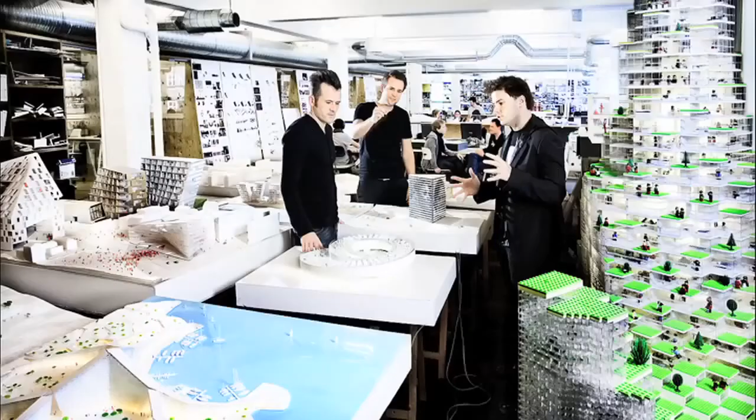Essentially, we're a company that's been around for 12 years in Copenhagen. These are our Copenhagen offices. We recently moved into this big, nice space with 40-foot ceilings. It's the beer bottle cap factory of Carlsberg, which is like a perfect place to conceive of architecture. We also have this office where we now have 65 people operating out of New York.

If you look at it in the really big picture, architecture is the art and science of constantly trying to make sure that our physical framework, our cities and buildings, fit with the way we want to live our lives. That's essentially the challenge. We have not only the possibility, but also the responsibility, to make sure that the city we inhabit is actually the world we would like to live in.

Because it's not like God created the cities, or anyone else did. We actually built them ourselves, and if they don't fit with the way we want to live, we should actually do something about it.

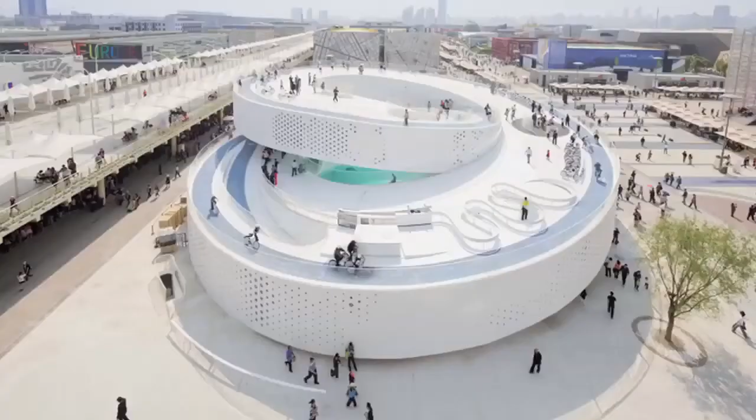So we tried to consolidate all of the elements of a Danish streetscape, complete with the blue bicycle lanes of Copenhagen, allowing visitors to actually bicycle through the pavilion. In Denmark, or in Copenhagen, 40% of all the people commute by bicycle, so they're never stuck in a traffic jam.

We have city bikes, this free system of bicycles we've had for the last 15 years. We just got it in New York now also. So we allowed people to experience the joy of biking through the city instead of being stuck in a traffic jam or endlessly searching for a parking spot.

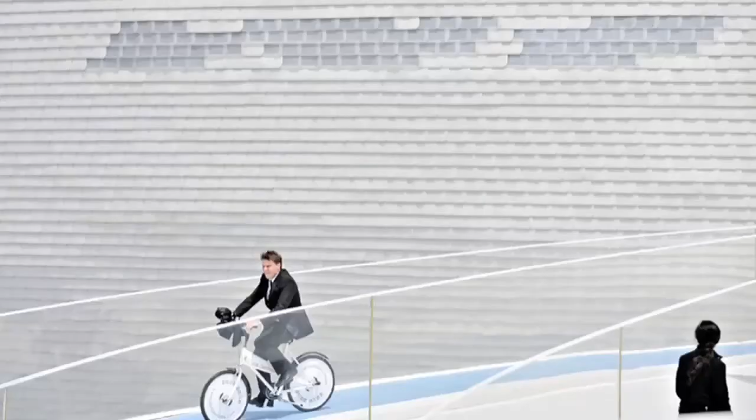You could also bicycle through the exhibition itself, making it the ideal museum for impatient people, because you could actually see everything in 3 minutes.

And at the heart of the pavilion, in Copenhagen, our first project that we completed in 2002 was the Copenhagen Harbor Bath, which extends public life into the water because our industrial port has become so clean that you can swim in it.

So you don't have to sit in the car for hours to go to the Hamptons if you live in New York, or I mean, it's a bit like living in Miami and Fort Lauderdale, basically.

But essentially, we tried to bring this experience to Shanghai. We put a harbor bath where people could experience how clean, if not how cold, Copenhagen harbor water is.

Basically trying to physically implement all of these elements, examples where a sustainable city also makes it more enjoyable.

Then we thought, how are we going to get all the Chinese to come and experience this? It's cool if it's there, but if they don't come... So we started looking for common denominators between Denmark and China. And we found that in the public school curriculum, they have 3 fairy tales by Hans Christian Andersen.

All Chinese grew up with the story of the Little Mermaid, the national symbol of Denmark. So we thought, what better way to get them to come than by moving the mermaid to China for 6 months. When the Danish Nationalist Party heard about this—they're like the equivalent of the Tea Party in Denmark—they tried to pass a law specifically against moving the mermaid.

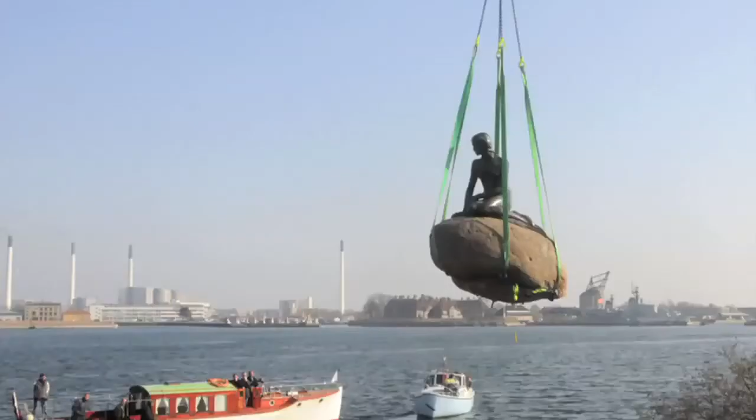I had to go to Parliament to argue her case, and as you can see, we got her. Then we had to get her through Chinese customs, and then into the pavilion.

Actually, in her absence, we invited the Chinese artist Ai Weiwei to make an installation as a sort of cultural exchange. What he did was install a Chinese surveillance camera in the pavilion—the same camera that the Chinese state has installed in front of his studio. He's still under house arrest.

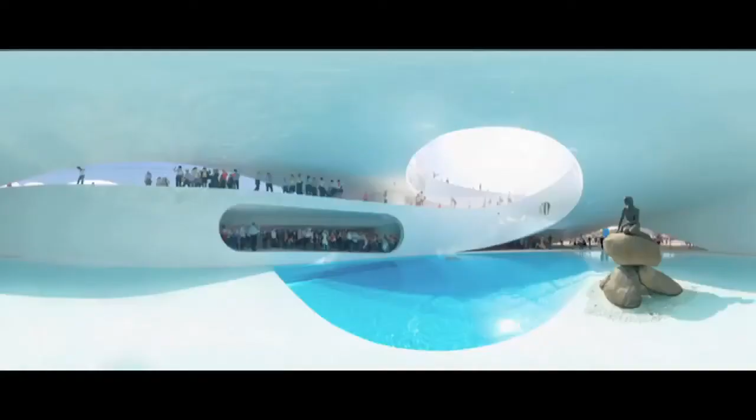But this was actually part of an installation he called the Mermaid Exchange, transmitting a live image mounted in Copenhagen where the mermaid normally sits, so people could see that she was okay. But also, politically, it became almost like a loophole in the Great Firewall of China, becoming the only uncensored live TV feed from China to the rest of the world for the 6 months of the duration.

So this was the first time we coined this idea that maybe sustainable cities can actually increase our enjoyment of life. You can say the way we try to work as an architecture office can be summed up with what we call knowledge-driven design.

We don't have a preconceived style or aesthetic. We try in each and every case to analyze what are the key criteria in a specific project, what's the greatest concern, what's the biggest problem, what's the biggest potential, and try to turn those factors into the drivers of the design decisions.

So in a way, each and every design decision is informed with a specific piece of information. You can almost say that architecture is like portraiture—the art of painting a portrait of someone. To design a building for a client, an institution, a city, or a place is a bit like painting a portrait.

Because, like the beauty of a portrait, of course it's in the artist's capacity in expressing him or herself as an artist, but maybe more importantly, it's in the artist's capacity in expressing the subject. In a way, a beautiful portrait is 100% the expression of the artist, but also 100% the expression of the subject. And if you like to consider architecture as an art, I think the art that interests me is often the art that expands your perception of the world or of life or society.

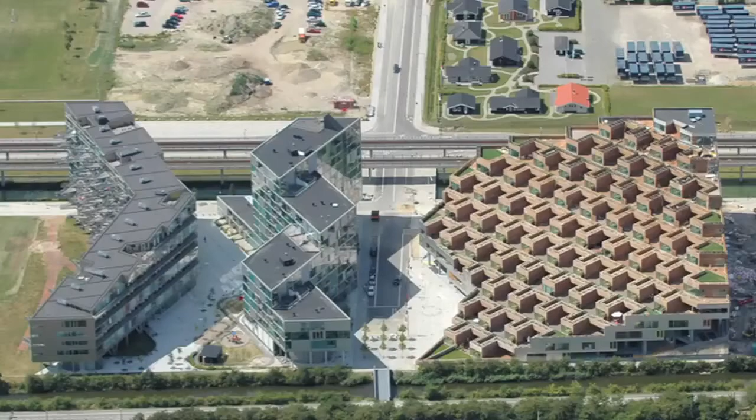So next to it, we were asked to do this parking structure with an apartment building next to it, and we thought: instead of having this block of apartments looking at a box of cars, why don't we turn all the apartments into penthouses? We follow the maximum envelope of the city code, even further tilt the apartments to face south, then chop up the volume so as not to block the view from my apartment.

And basically all of the parking is located on the deep space on the ground, right close to the street. And all of the apartments become like houses with gardens, with a penthouse view, but in the middle of the dense city. So it essentially becomes like in a completely flat city, as flat as Fort Lauderdale. We make this sort of man-made mountain of homes where your kids can run out and play, but you also have a view, and you're in the middle of the city.

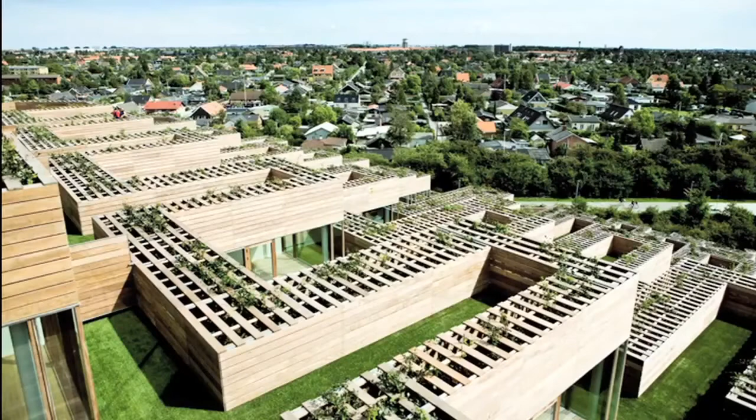It's made possible because the cars occupy all of the deep space to the north. You have a single funicular elevator that gives access to all the apartments. And to make the parking naturally ventilated and naturally illuminated, we clad it with a perforated aluminum facade. It's the cheapest facade you can put on a building. But because we could vary the hole sizes from very small to a bit more than an inch, and because the holes look dark on the bright aluminum, from a distance it turns into a gigantic artwork for free.

And basically you can see where it's dark is where it's more transparent. So at night you can actually see through the building in the dark areas. And essentially what makes the mountain look different is also what makes it perform different. It's not some strange aesthetic that we've applied. It's essentially what makes the building breathe and allow daylight, that also turns it into this giant urban artwork.

We call this idea architectural alchemy, that you can actually create, if not gold, then at least added value by mixing traditional ingredients like parking and apartments. When you put them together in a new combination, you can actually create something else.

We took this idea one step further in a project we've called the 8 House. It's really on the city limits of Copenhagen. It's going to be part of this new dense neighborhood next to the new subway. And this is where Copenhagen stops, and cattle take over.

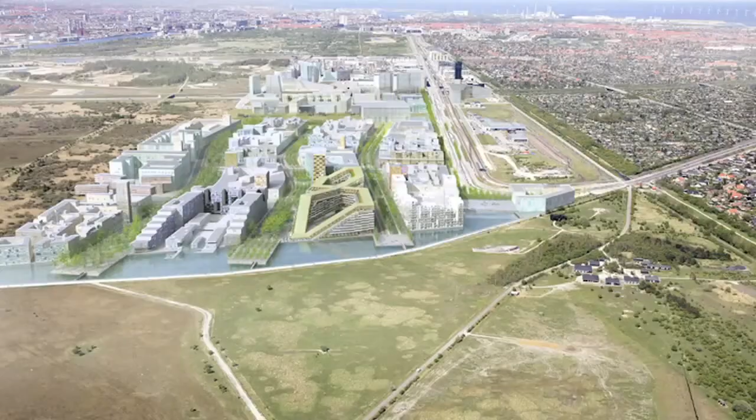What we thought, like when you're building a new neighborhood from scratch, how do you give it the diversity of a historical city? It's like 600 feet long, 300 feet wide. Basically we thought, why don't we look at the programs? Shops and offices, they like to be close to the customers on the ground. Apartments, they can go on top. They like the view and the sunshine.

But because residential floor plates are less deep than commercial floor plates, we get space for little gardens, like townhouses with gardens, maybe a small path. Then we add a layer of more classic apartments, and then sort of penthouse townhouses.

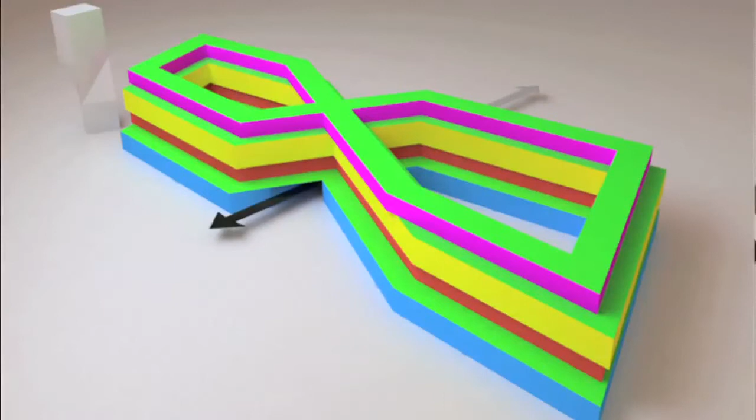The master plan asks for a shortcut through the building. So we create these little plazas, and it becomes like a figure 8. And then shops and offices, they like daylight, but they don't like sunshine and glare. You don't want to have sunshine on your computer screen.

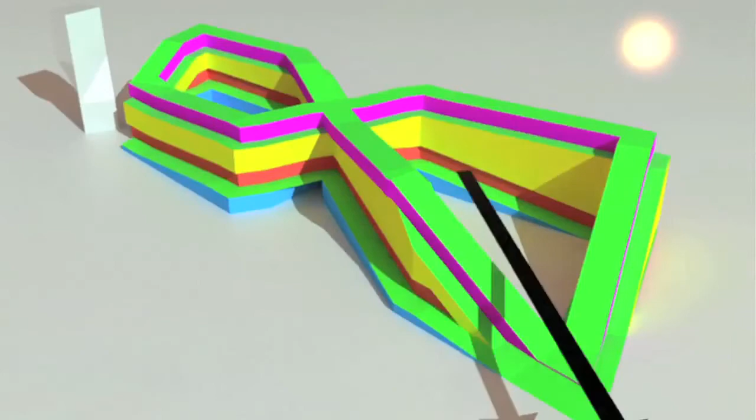So to the south, we push them down to the ground, and to the north, we create a 4-story office building that also brings the residential programs into the light and the view. And finally, to the southwest, we push the southwest corner down, opening up the entire courtyard to the views, creating this distorted figure 8 where you can actually walk and bicycle all the way to the penthouse.

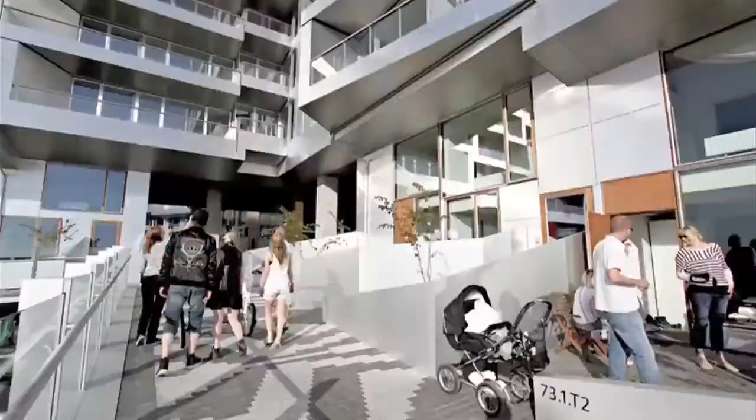So you can say this idea of architectural alchemy, it doesn't only allow you to maximize the conditions for the different programs. You can see the townhouses are lifted up into the sun. The offices become like a 4-story office building that's like in a cool, comfortable shade.

But also in a new neighborhood, in a traditional city, a new neighborhood, the most important thing is to actually create a community, to create a feeling that this is a real part of the city, to allow people to get to know each other. And traditionally, social life is restricted to occurring at the street, whereas here, it's actually allowed to expand all the way into the 3-dimensional space of the block.

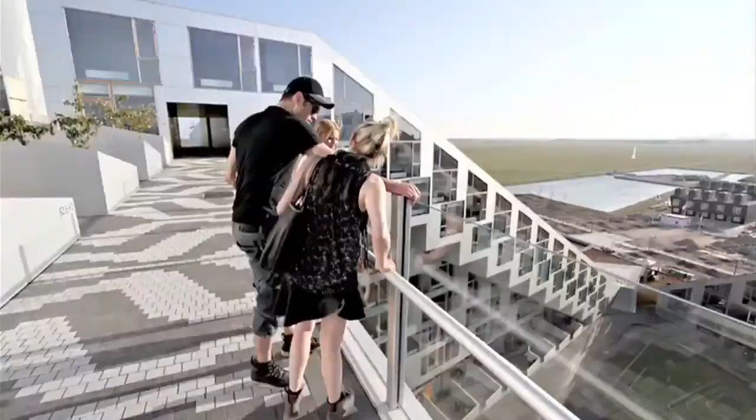So the 8 house is not just like a pretty facade or a sculpture. It's really a 3-dimensional urban condition that allows social life to invade all the way to the penthouse and back down again.

So basically, you can say the whole architecture of the 8 house is really about trying to explore and exploit the potential synergies between the different programs. The different programs can almost like support each other.

Where the 8 house crosses itself, all of the amenities are put together in an atrium, sort of connecting the entire building from the top to the bottom.

And also it becomes like, you can see this is how flat Copenhagen is. It also became a place where people in Copenhagen actually go just to enjoy a walk and the view, because it's the only place in Copenhagen where you can actually get a view of the city you're living in.

So we recently came to America 2.5 years ago on the invitation of a developer in New York called Douglas Durst, because I quite often get the objection that these things only work in a sort of socialist Scandinavian context. But I think a Manhattan real estate developer should prove otherwise.

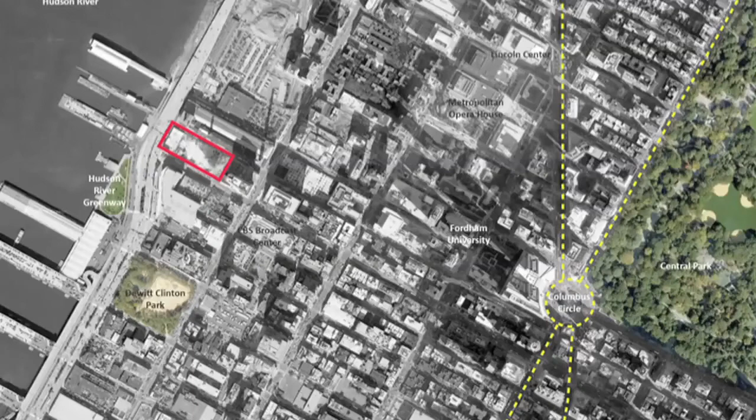But this is him saying this, I'm just quoting him. Essentially, he found this site on the west side of Manhattan. He'd been trying to develop it for a while, but they weren't really getting anywhere. It's perfect to the south and the west, but it's sandwiched between a power plant, a sanitation garage, and the West Side Highway.

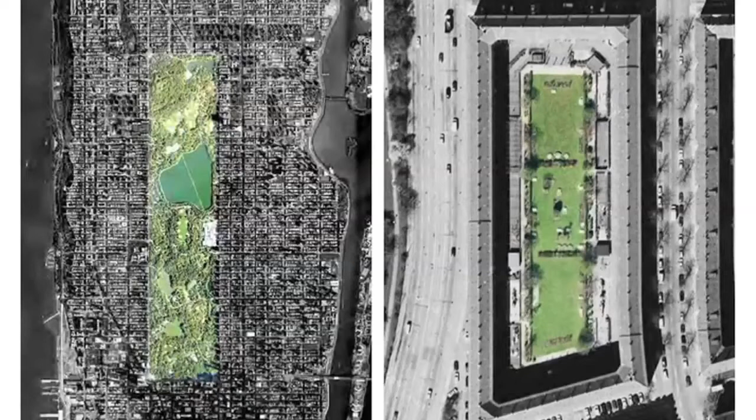So we thought what they really need is like an oasis in the middle of Hell's Kitchen. And this is the city block where my dad grew up in Copenhagen, because in a way, the Copenhagen courtyard with this park in the middle is almost at the architectural scale what Central Park is at the urban scale.

An oasis in the middle of the dense city. So we thought, what happens when you combine the density of a skyscraper with the sort of social green space of the courtyard? Or what could a court scraper look like?

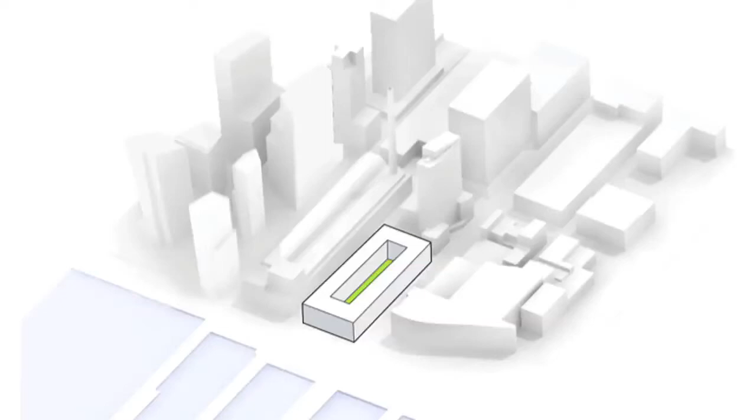So basically, we placed the courtyard next to the Helena. It's a residential tower owned by our client and named after his daughter. So we try to preserve all of the existing views of the Helena.

But still, to give it Manhattan density, we lift up the north corner to 470 feet, maximizing the conditions for daylight and view, creating this sort of really striking new silhouette on the west side waterfront of Manhattan.

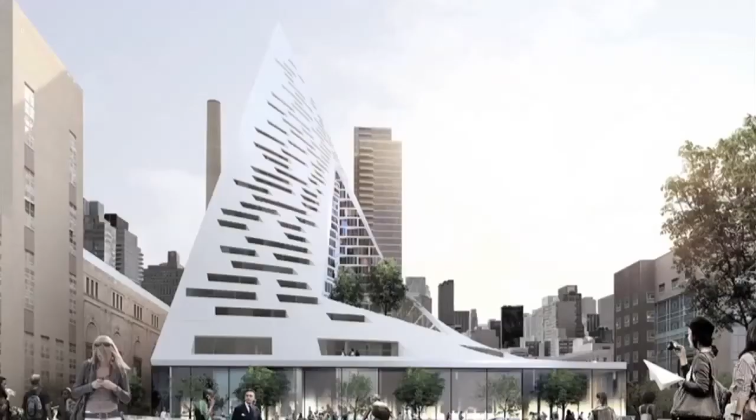Basically, from the east, it becomes more like a spire. And when you enter into the lobby, you have this generous staircase that takes you up into the courtyard that has exactly the same proportions as Central Park.

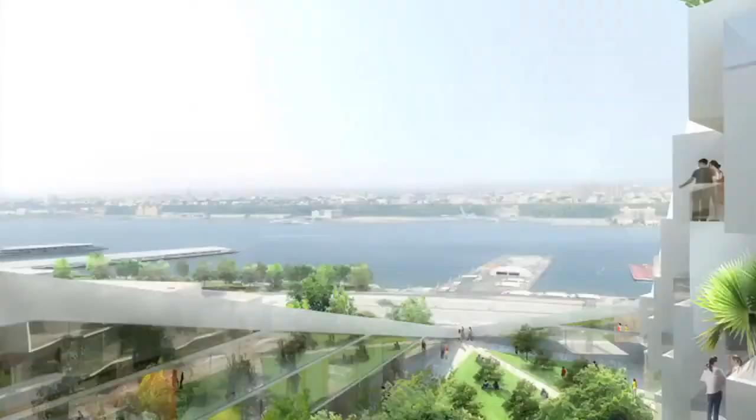It's just 15,000 times smaller. And it basically goes from 42 inches, the height of a handrail on one side, to 470 feet on the other end. Everybody facing south has a nice balcony or terrace sunken into the roof.

And it's almost as if the rejuvenation of the waterfront starts invading the city block itself. It's currently under construction and should be completed in December 2015.

So since coming here, we've had a chance to really engage with a lot of different conditions that are completely unlike anything we'd ever encountered in Europe. We met a Canadian developer, Westbank, who had a site right where Granville Bridge hits downtown Vancouver.

Vancouver is also sometimes nicknamed Hongcouver. It has a really big Chinese population. And the downtown is actually mostly residential; all the towers are residences.

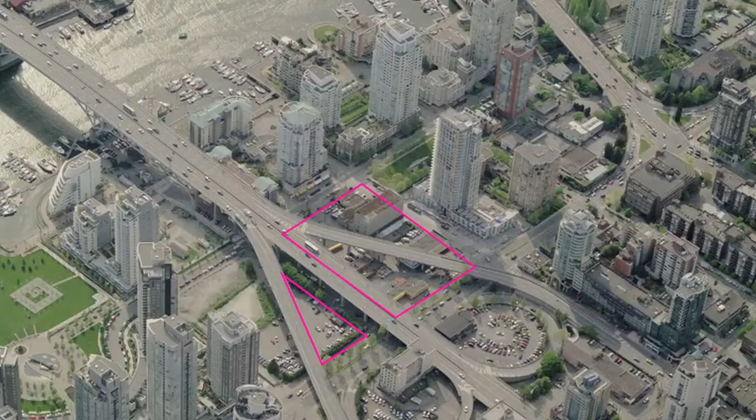And as you can see, the site was being shredded to pieces, little triangles by the bridge. Also, the client had worked on it for a year and a half without really getting happy with the results.

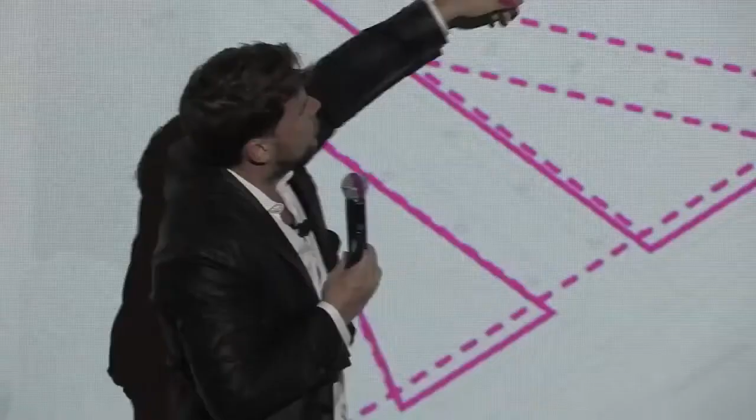So we tried to analyze all of the conditions, the setback requirements from the bridges. There was another 100-foot setback because the city wants to secure that nobody lives and looks straight into heavy traffic. Then there was another setback to secure that we wouldn't cast shadows into the park next door. And finally, we're left with this tiny triangle, 6,000 square feet, almost too small to develop.

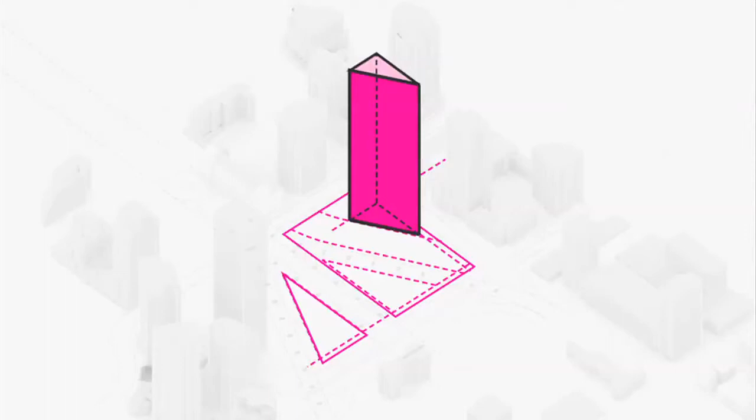But then we were thinking, if the setback requirements have to do with a minimum distance, as soon as you get 100 feet into the air, you can actually come back out, double the size of the floor plate, and maximize the amount of the nicest apartments with the best view.

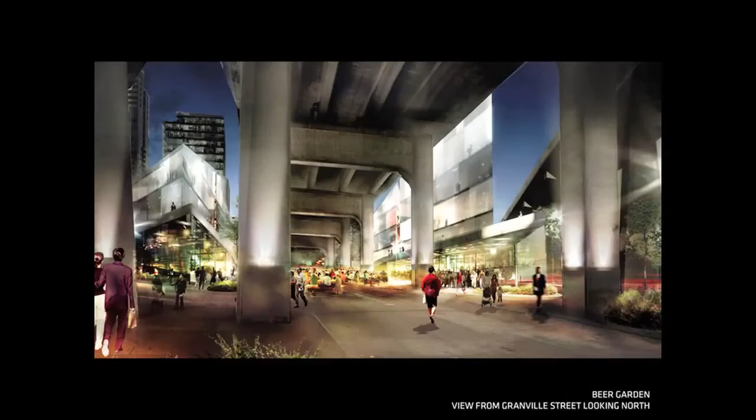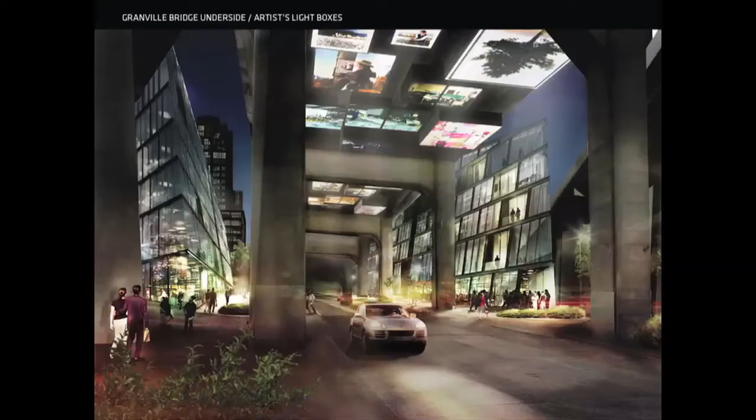You can actually have shops, offices, restaurants underneath the bridge. So we're trying to turn the community under the bridges into something lively and exciting. Vancouver has a lot of very significant photo artists, so right now we're communicating with Rodney Graham about transforming the underside of the bridge into this street art version of the Sistine Chapel, where all the art pieces are above you rather than on the walls around you.

Fort Lauderdale is unique in a global context in that it has found a way of creating this totally unique form of relaxed living, where you can have the American dream of a suburban home with a yacht in the backyard. It's the architectural equivalent of surf and turf, I guess.

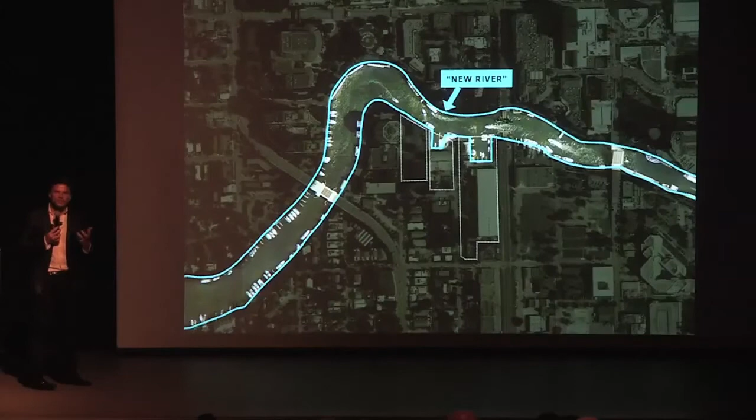But so far the urban inventions of Fort Lauderdale have been primarily suburban or low density. As a result, the downtown has been, maybe until recently, the less interesting part of Fort Lauderdale. The ambition of this project is to embrace this emerging tendency to focus on the inner city.

We're located right at the New River, on these three parcels. When we met Asi, the first thing we did was go down to Fort Lauderdale and walk the site. The site already had a lot of charm, different forms of maritime activity, water taxis, a vertical marina. It was kind of a revelation for a Dane to see that a marina can be this dense urban equivalent.

It's actually a 3-story parking structure for boats, and the whole intention was to be good neighbors to the residential neighbors nearby, while respecting them. But essentially the main thinking was to embrace and accommodate all of the culture, all of the life that was already there.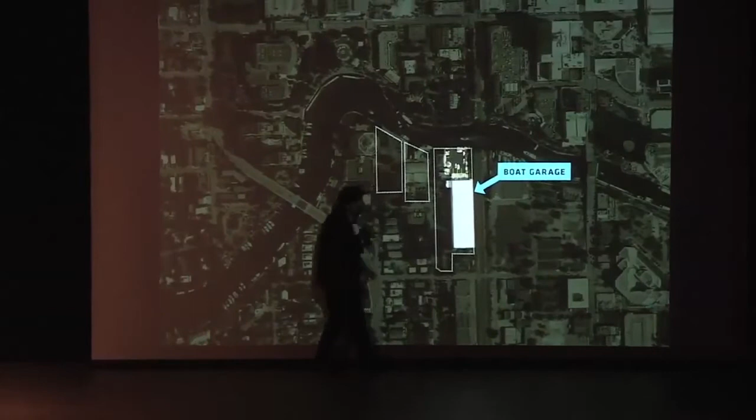So to keep the vertical marina operational and running as part of the spirit of the place, to retain the water element and the presence of water taxis in the water.

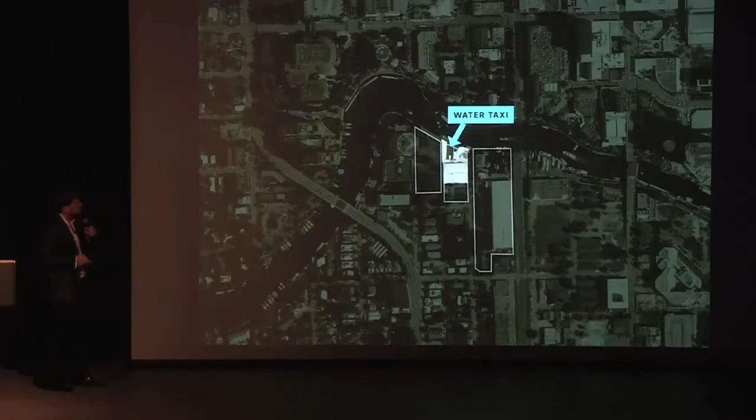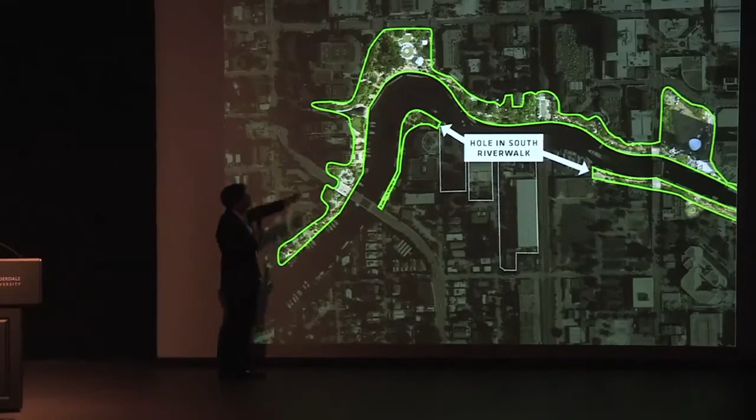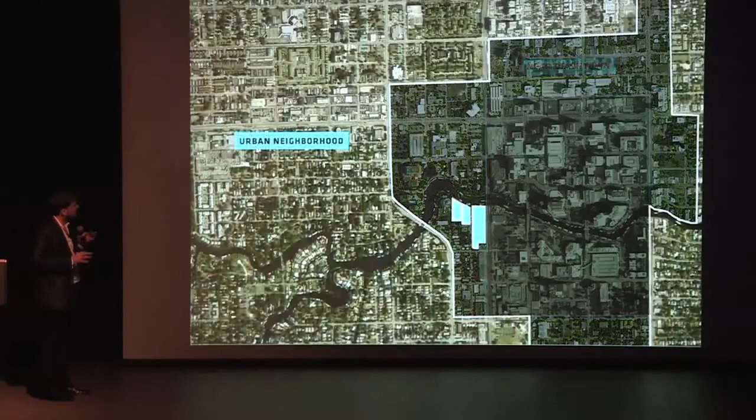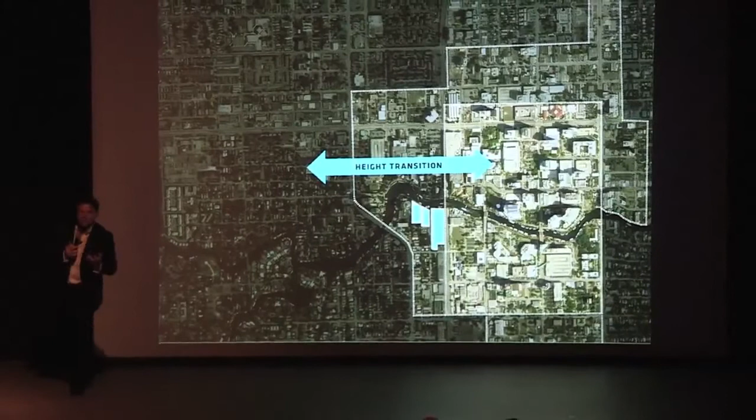When you look at the skyline of downtown Fort Lauderdale, you can see a build-up towards the downtown core. The downtown core is literally where we are. Then as you expand out, you have the immediate perimeter, and then the urban neighborhood around it. So there's almost a gradient towards density, and one of the main drivers of creating a walkable, mixed-use, lively urban environment is to provide a certain density, so there's actually a population to be there.

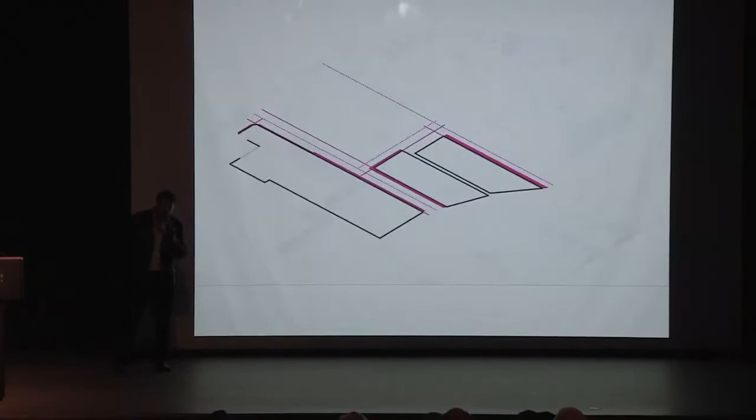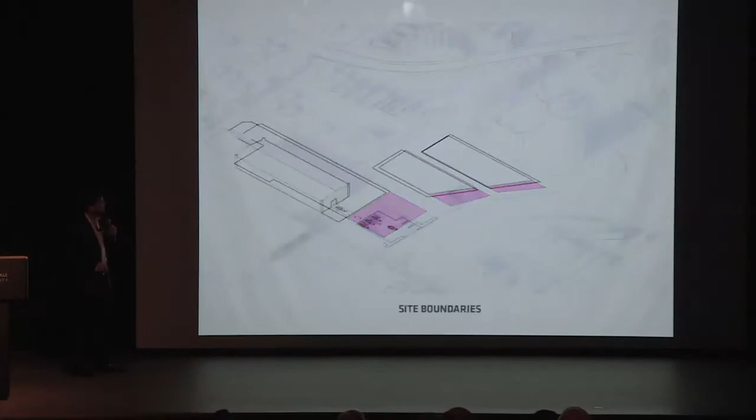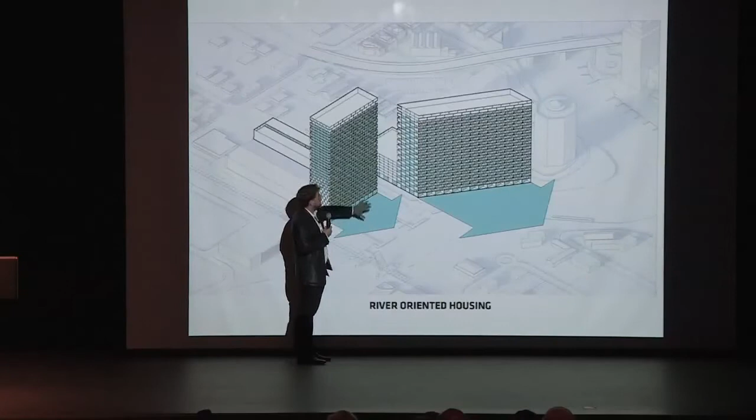So basically, these are our sites. We work with expanding the public realm by encroaching a little bit on the footprints of our sites, creating a generous public waterfront. The basic idea is to keep the marina operational. We imagine lining the entire riverwalk with our buildings to maximize the amount of views for the residents to the water, but also the presence of human life on the balconies when seen from the water.

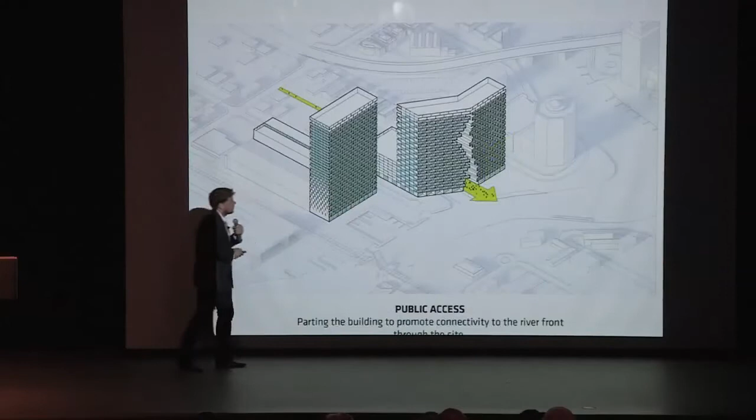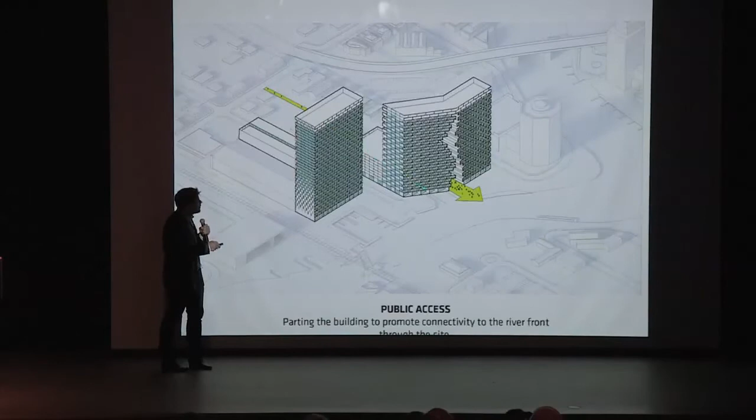To be a nice neighbor to the esplanade, we break the building back, creating a more generous park space on the riverwalk and preserving all of their views down the river. In opening up to our neighbors, we also open up this pedestrian connection, allowing the entire community to the south to actually come out and connect with the riverfront.

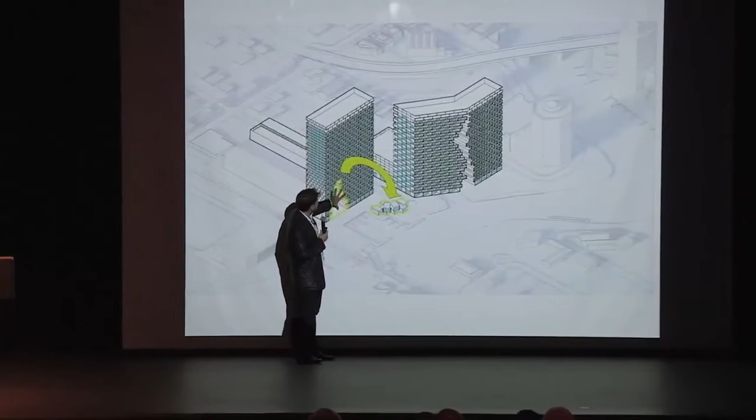In a similar way, we create a gate into the marina, so you'll actually have a building where the boats appear and disappear from the building itself into the water, making the life of the area into an urban spectacle. The units we peel out to open up for the boats, we put together in a small sculpture on the public area to create little restaurants and bars.

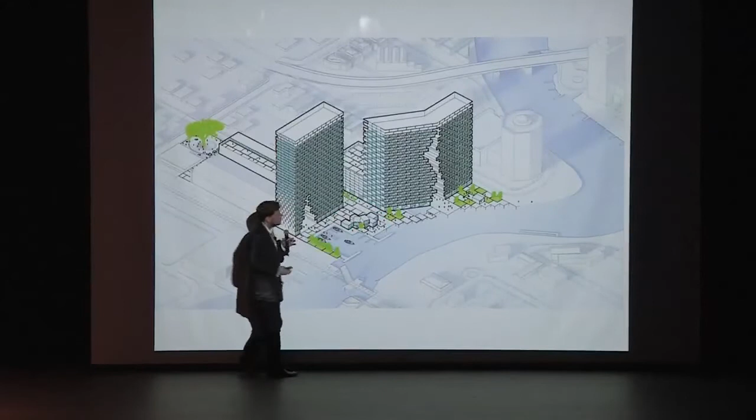So all of the public promenade, all of the public space, all of the amenities, we have community-oriented retail and restaurants along the ground floor and in this pavilion to create a lively destination that will not only allow people to walk here, but give people elsewhere a reason to walk over here.

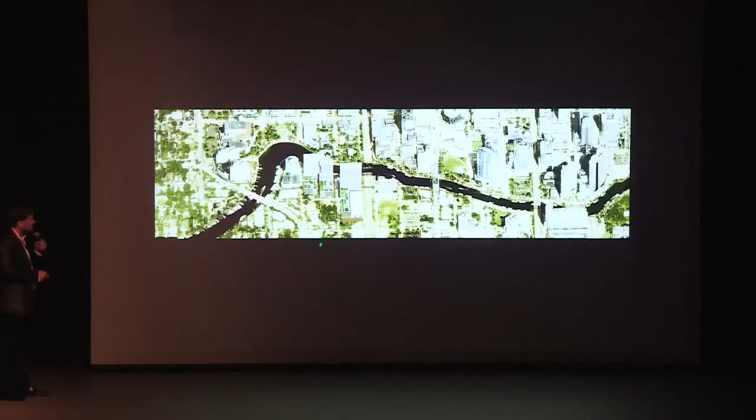Here you can see the building volumes in the context of the site, and how this passage becomes the main reason for the opening out to the water.

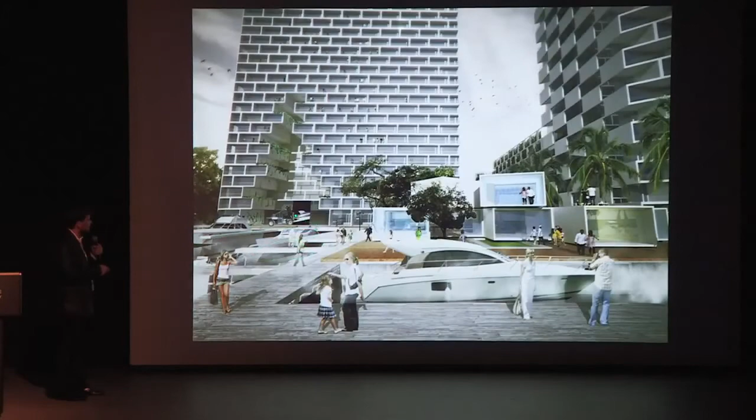This opening becomes almost like a vertical hanging garden, giving some of the apartments these very special terraces. You get a nice green promenade along the water. Here you see this little pavilion that coexists with the marina, with boats appearing and disappearing out of the architecture itself.

The big rain tree, we propose to move and give it a nice park as the main arrival point to the community when you arrive from elsewhere, not from the Riverwalk. Then you get this pedestrianized streetscape that takes you all the way to the water.

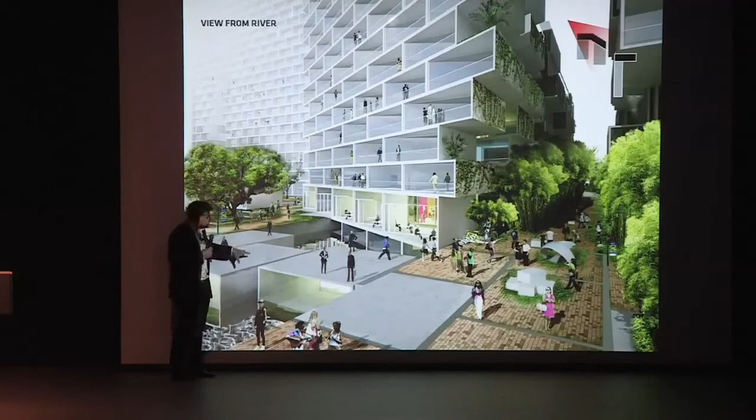You can see how within the community this big vertical opening becomes a major part of the city around it. We also propose these floating bridge elements that almost appear as if apartments have fallen into the water and become the bridge that you walk on.

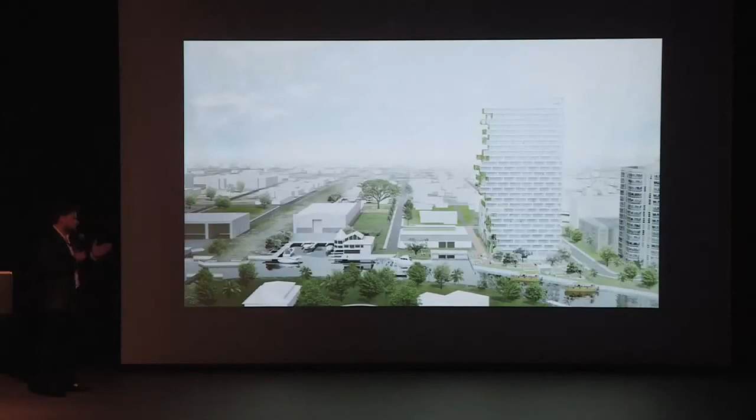This is going to be a successive development. We studied that even phase one will look incredibly striking as this disciplined slim tower that has this sculptural edge. Of course the reading changes once it becomes like a gateway, and finally the building becomes the gateway to the marina.

But even in the first year, this is really going to be a rather striking east-facing facade.

So essentially the main principles we've taken to this part of Fort Lauderdale are to embrace all of the existing qualities and character, and take this uniquely Fort Lauderdalean merge of land and water from a suburban context into an urban context, creating a really lively neighborhood in the middle of downtown Fort Lauderdale.

Here you can see the experience of living in this community overlooking the streetscape and the cityscape around. As Asi mentioned, we hope to get the final meeting on this project the 2nd of July or the 20th of August. I think it could be quite an interesting development in the urban history of Fort Lauderdale so far.

Actually, I consumed my time, but I want to finish by showing you two projects that I think capture somehow the essence of what we try to do.

As you can see, in basically all of the work we do, the involvement or engagement of the public is always a significant part of it. Although most often we are commissioned by private clients in various ways, because what we do will eventually become a significant part of the city, we have to try to accommodate other desires than our own or our clients'.

In one case, a typical project, our first building in Copenhagen, a maritime youth house, we turned all of the buildings into a man-made dune landscape that becomes an informal playground, which instead of just being clubhouses for the boats, actually became a significant part of the public space of Copenhagen.

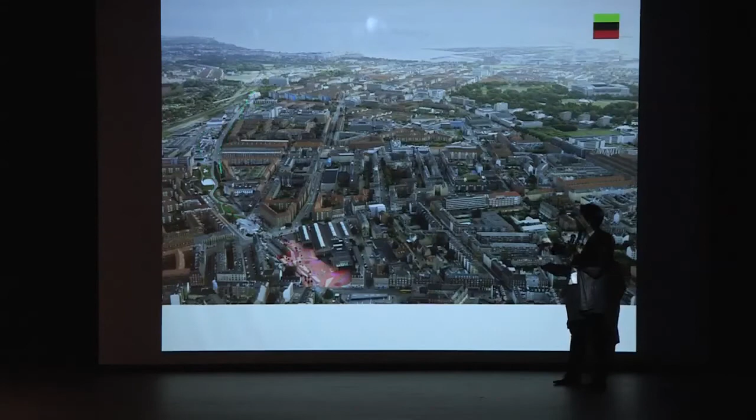At the same time, we got invited to look at a former rail track in our neighborhood and turn it into a one mile long public park. It was clear this project would be all about creating a sense of ownership and integration in this neighborhood — the most ethnically diverse in all of Denmark. You have more than 60 different nationalities, a lot with Islamic background, but essentially from everywhere. What we proposed was a simple idea: the red square, the black market, and the green park.

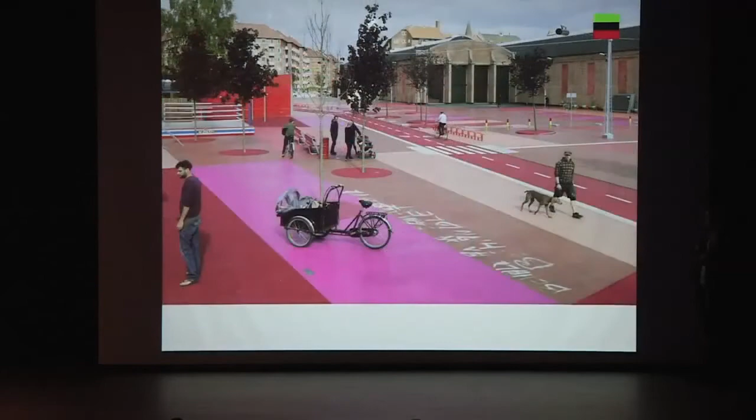The red square is literally different shades of red, indicating different activities. The black market — everything is black. And finally the black market rolls in and becomes the green park.

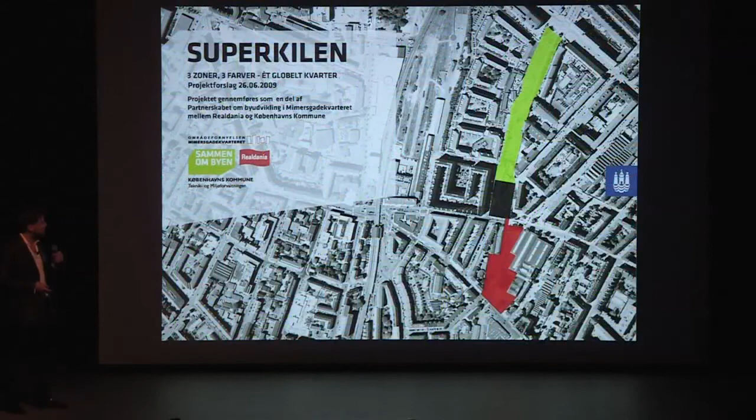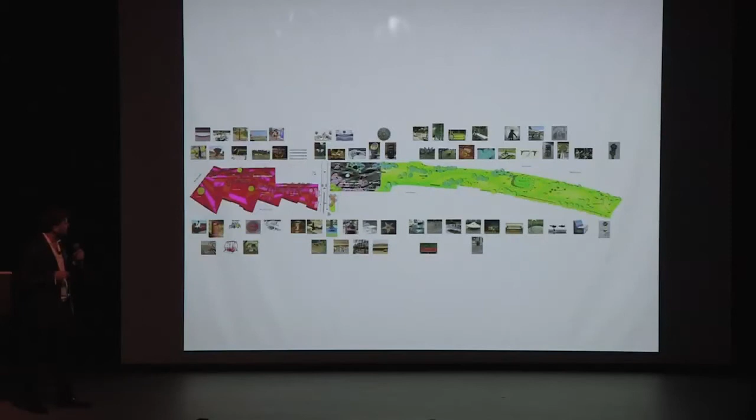I'm just going to explain one aspect of the project. Rather than plastering everything with Danish design, we thought we could reach out and explore the ethnic and cultural diversity of the community as a driver for the architectural design of the urban space. So we reached out and asked everybody in the community, through local media, Facebook, political meetings, ads in the local newspaper, to recommend elements from their home country that they thought could be cool. Because it would be strange if the Danes had designed the only nice bench, the only nice lamp, and the only nice trash bin.

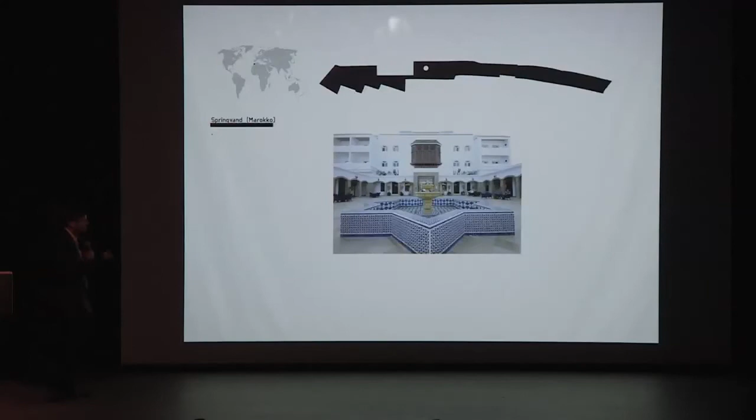So we got a series of recommendations of things from other cultures, for instance this Moroccan fountain. The basic idea has nothing to do with political correctness — we wouldn't eat Indian or Chinese food just to be nice to them, we eat it because sometimes we really need spring rolls. The reason we placed a Moroccan fountain in the heart of Copenhagen is because the Moroccans have an amazing tradition for architectural water features. Somebody recommended it, and we curated all the recommendations and created this Moroccan fountain in the black square.

Somebody recommended an outdoor sound system from Jamaica — you can plug in your iPhone and it amplifies your sound, and the neighbors obviously love it. But the beauty is that we designed it to stay under the maximum allowed limits, and it shuts off automatically at 9 p.m., so it's completely within the law.

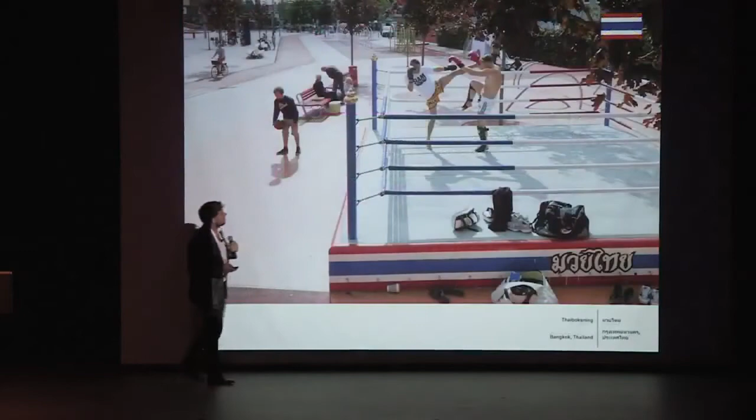Almost like making it an art exhibition, all of the objects have a little stainless steel plate saying what it is and where it's from, in Danish and in the local language. So we have a Thai boxing arena from Thailand, play things from India, swings from Iraq, a whole muscle beach from Turkey, litter boxes cast iron from England, and bollards from Ghana.

And obviously, because it's Denmark, you need a lot of bicycle parking — this cool one is from Finland. The sign on the red square is a sign from the red square. Check out this bus stop — it's from Kazakhstan, way cooler than anything we'd normally have. We found this elephant slide in Ukraine; it's actually from Chernobyl, so we had to make a replica because the original was radioactive.

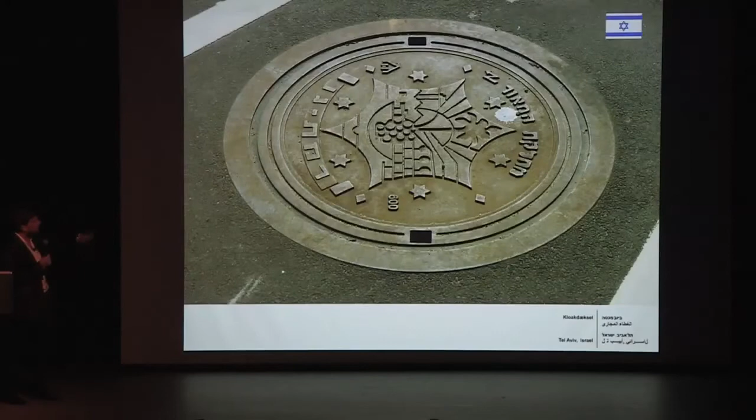Even down to the manhole covers, we have nice ones from France and Switzerland. Because a lot of the local immigrants have Islamic backgrounds, we chose an Israeli object that is completely indestructible. We even found palm trees in China that naturally grow in a Danish climate — they're from the same climate zone, called hemp palms. We have this beautiful glass fiber octopus plaything from Tokyo.

When you go there, it's really a display of the cultural diversity, showing that playing is a complete way of bridging barriers of language, culture and religion. When you look at the benches, it becomes a social study of the different nationalities — a love seat from Mexico, an S-curve that lets you watch the person next to you in the eyes, and from Belgium, a bench where everybody looks away from each other. It becomes this incredible display of everyday inventions from different cultures.

Finally, we took it all the way into the lighting. One of the main reminders that you're in a foreign culture when traveling is the advertisement. So as a series of sculptural lamps — since Denmark, including Copenhagen, prohibits neon advertisement in a lot of places — we made sculptural lamps that advertise stuff you cannot buy in Denmark, including, obviously, a nod to American culture in the park.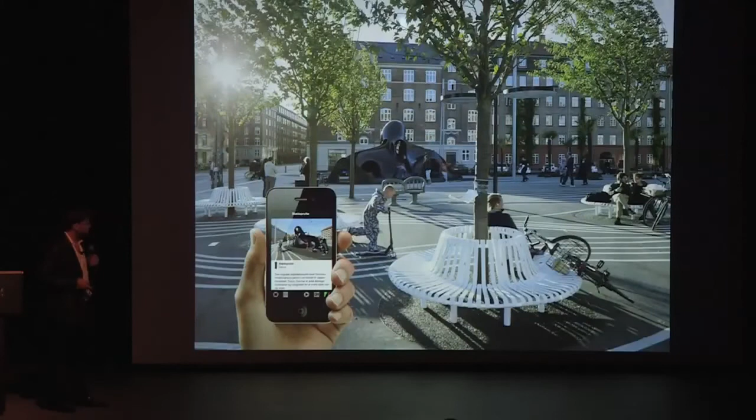We did it together with the landscape architects Topotek 1 and Superflex, the artist group. The app basically allows you to see what the different elements are and read the story of where it came from and how it was recommended and why it's here. So in a way, it's an example of almost turning the authorship over to the users, as this sort of excursion in extreme public participation. Now I'm going to fast forward, so you'll just enjoy the images.

This is the National Art Museum of Greenland. This is a museum we're doing next to Prince Hamlet's castle, Kronborg. I'm just getting to the last one. Oh yeah, maybe I'll show this.

I realized that actually everything we're doing in Denmark is underground. I don't know what to conclude from that, but this is my old high school, and I got approached by my old math teacher to see if we could make a new sports hall for them. And the only place that there was space was actually on the football fields. And I wouldn't exactly win a popularity contest if I sacrificed the soccer fields. So we proposed to put it underneath the courtyard of the school.

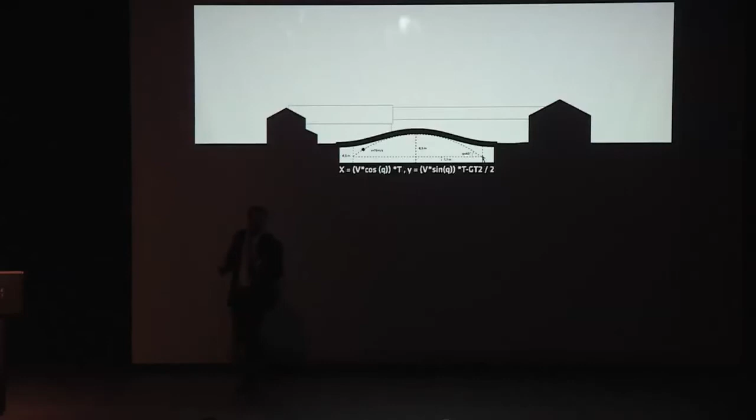Basically, the canteen is in the courtyard, and because it was my math teacher who gave us the job, we followed the rules of handball. It's a handball arena—a Danish sport invented by a Danish soldier, but you need 15 feet on the perimeter and 30 feet in the middle. So we just used the formula for a ballistic arch to design the ceiling of the sports hall.

It becomes like this, almost like a social molehill. We put in various kinds of furniture, like a melted bench, a ring of chairs with little tables, this sort of outdoor auditorium. And it has really exploded the use of the courtyard. Even though you would feel that it actually occupies the courtyard, it actually makes the courtyard much more inviting. The wooden surface serves as a bench on the edge and as a hillside where people lay down and enjoy the sunshine when that happens.

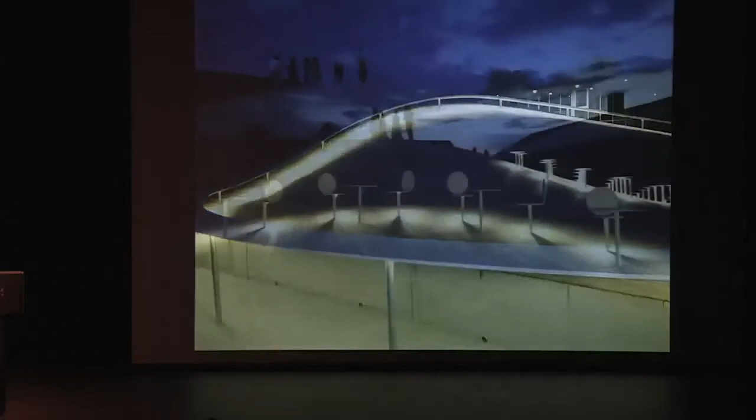And inside, it's actually the mathematics of a thrown handball that creates this beautiful curving roof. You have skylights along the perimeter that wash the walls in daylight, and you end up getting this very expressive curve that is purely expressing the space that a thrown handball needs to be able to reach the back line. And at night, all of the furniture has illumination, so there are no specific lights, but all of the furniture creates a halo of light around them.

And I must confess, it gives you incredible pleasure to mess up your old high school. The construction phase was like two years of disturbed classes.

As a prelude to the last project I want to show, there's this idea that even though there's a lot of private initiative, you always have the possibility of creating public benefits when you're working, like in the case of Fort Lauderdale. And it's these hybrids that always interest us.

One example, almost like a hybrid between infrastructure and culture, is a project we're doing in a sculpture park in Norway. The sculpture park was on two different sides of a river, so you would have to move around, and we were free to place the museum where we wanted. So we actually placed it as a bridge spanning across the river. So very simply, when you move through, you have a flat area on one side and a steep hillside on the other.

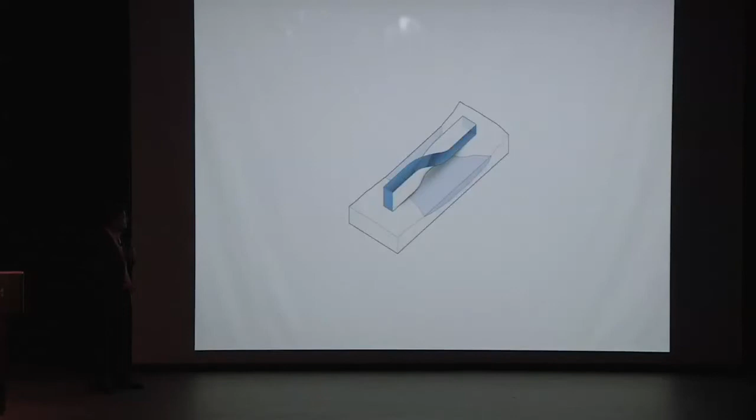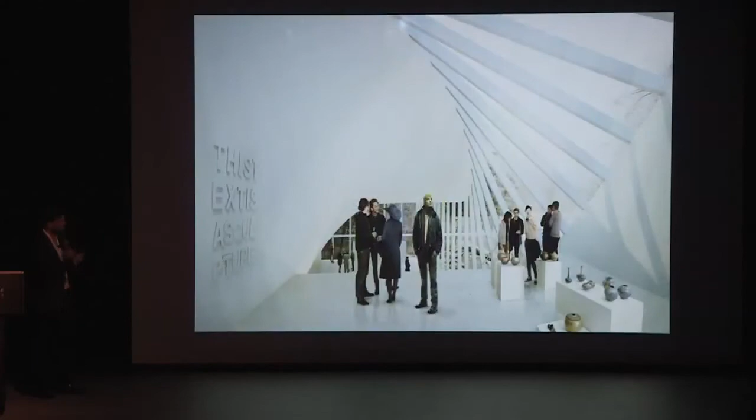So the building accommodates this change of grade by turning. Essentially, a skylight becomes a panoramic window. You enter into a very vertical space of galleries. Where the building turns, you see this fanning stair that connects the different galleries. The skylight pivots and becomes the window, looking at the old mill. And essentially it ends up being almost like a hybrid of a museum building, a bridge, and a sculpture.

You can almost see it as the biggest sculpture in the sculpture park. Depending on when and where you see it from, you might not know that it's a museum until you actually have to pass through it.

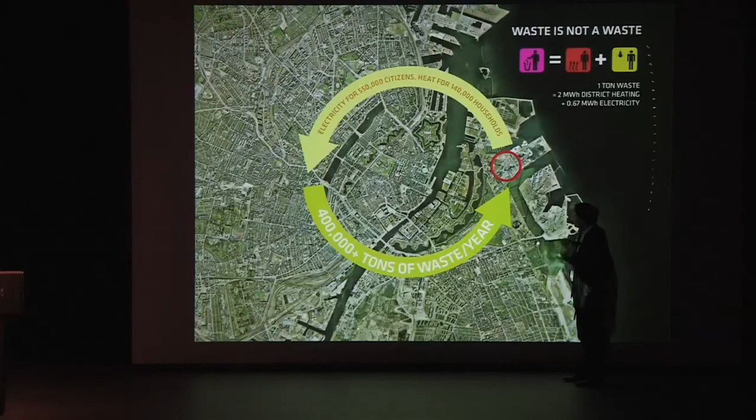That brings me to the last project I'd like to show, which is our biggest project to date, and which could be the future landmark of Copenhagen. It's right on the waterfront, in the middle of downtown. This is the opera, the Royal Theatre in downtown. But it's not a royal palace, and it's not a cultural palace.

It's a power plant that turns all of the waste of the inhabitants of Copenhagen into energy and heating. So essentially 6 pounds of household waste turns into 4 hours of electricity and 5 hours of heating. Seen as a resource, a ton of trash is 1 2/3 of a barrel of oil, so it's an incredibly valuable resource if you harvest it.

But of course, it's a big, ugly power plant. It's going to be the tallest and biggest building in Copenhagen, right next to the marina and right next to where the local boys go water skiing. So we were thinking, how can we make this a contribution to the community and not just a big box that blocks the view and casts shadows on the neighbors?

Danes love skiing, but as you saw, we have snow but absolutely no topography. We have no mountains, but we have mountains of trash. So people happily go 6 hours by car to Branäs in the south of Sweden.

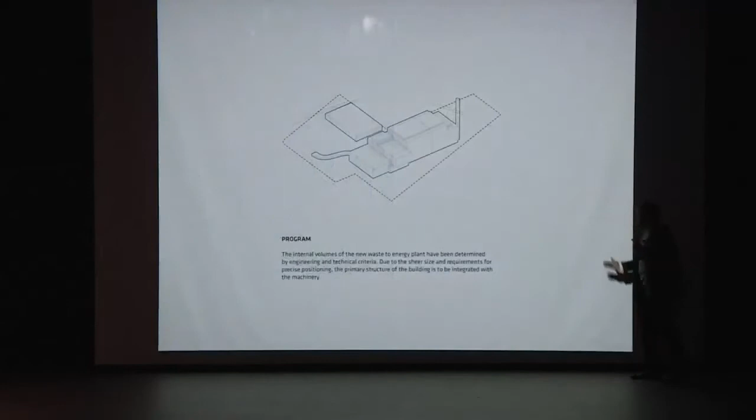Because of the sheer magnitude of our building, it's more than 300 feet tall, so we can actually do 2/3 of Branäs on the roof of our building. We know how big the different machinery is going to be, so we create a continuous roof. A single elevator takes you to the roof where you have a green and a blue ski slope going all the way down.

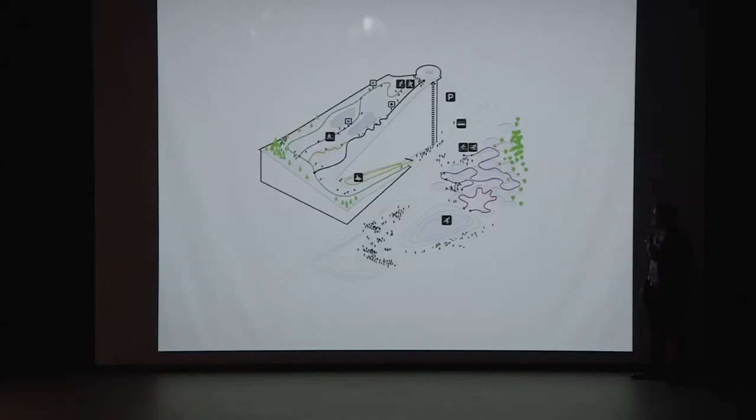Miraculously, we won the competition based on this idea. So from 2016, you're going to have to look out for the Danish competitors in alpine skiing, because now we can actually practice at home.

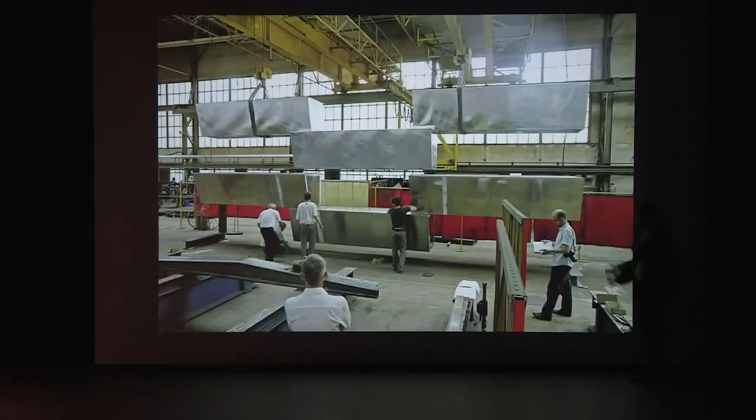We're doing facade tests for the manufacturing. But basically, this diagram I started showing—this idea of trying to imagine our cities and buildings like man-made ecosystems—is very close to coming to completion here.

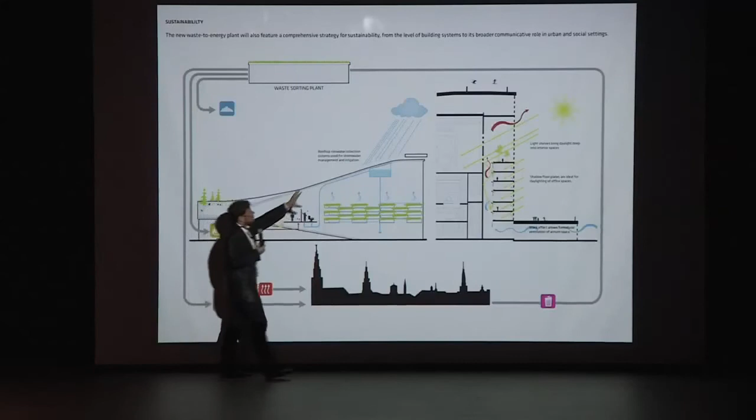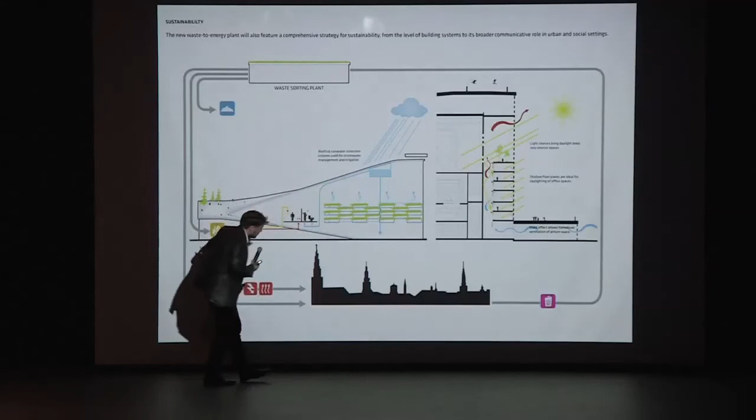We harvest the local resources—the water for the facade and for the utilities inside the building, the daylight, the chimney effect of natural ventilation—but also, together with the city of Copenhagen, the building actually becomes like a metabolism that transforms the waste into a renewable resource of electricity and district heating.

This is going to be the cleanest waste-to-energy power plant in the world. The smoke that comes out of the chimney is completely non-toxic, but it will still contain a small amount of CO2, much less than any existing power plant, but still there'll be some CO2.

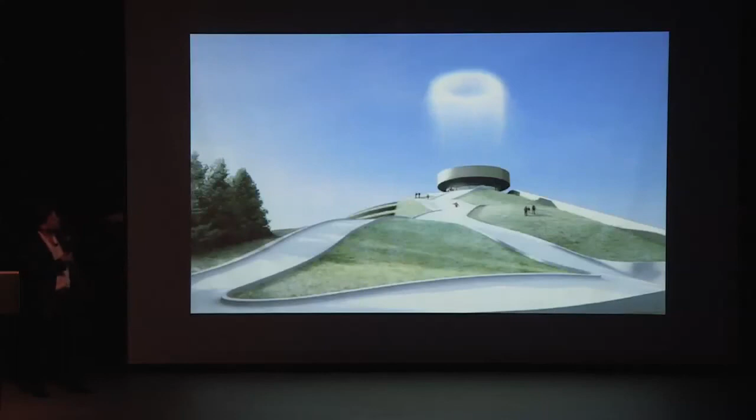So there were resources for an art budget, an art project. We worked together with Realities United out of Berlin, and designed the mouth of the chimney in such a way that it accumulates CO2, and when there's half a ton, it puffs a gigantic smoke ring.

Of course, on one hand, we like this idea that it's the ultimate artistic expression of hedonistic sustainability, because it turns something that used to be a problem, pollution, into something playful that actually puffs smoke rings, which is also why you can ski on the roof of it.

But also, and more importantly, one of the main drivers of behavioral change is knowledge—if people don't know, they can't act. Understanding always precedes action. Like I explained, our approach to architecture is this idea of knowledge-driven design, that specific information informs our decisions. And in a way, CO2 emissions is so abstract that nobody understands what it is.

But from 2016, if you come to Copenhagen and want to know what a ton of CO2 is, all you have to do is look at the sky and count the smoke rings. Each time you count 2 smoke rings, it's 1 ton of CO2. So in its way, it's projecting the carbon footprint of our lifestyle onto the skies of Copenhagen. So I think with that as the last image.